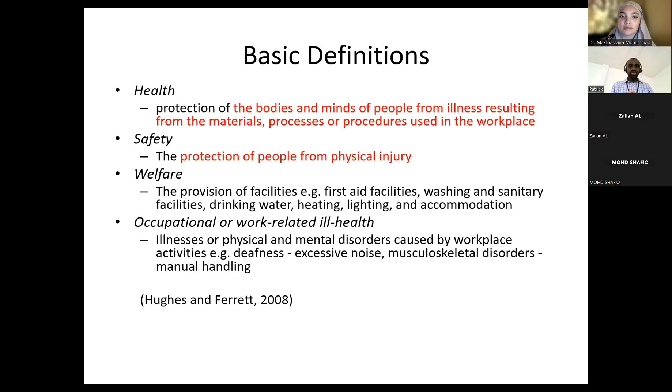Okay, so some basic definitions we should be aware of. When we talk about health, safety, and welfare, what do we mean? Health talks about how we protect the bodies and minds of people who work within our industry from illnesses resulting from the materials, processes, and procedures used within our workplaces. For construction, that means protecting people from illnesses resulting from the materials, processes, or procedures used within construction. Safety is mainly about protecting people from physical injury. So whereas health talks about illnesses, safety talks about physical injury. There are other things as well, but I wouldn't dwell too much on them.

When we hear people talk about accidents and near misses, what are they? A near miss is an incident that could have resulted in an accident. What is an accident? An accident is an unplanned event that results in injury or illness of people, damage or loss to plant, property, materials, or the environment, or a loss of business opportunity. If there is an incident that doesn't result in any injury or harm, we call those near misses. But if there's an incident that results in harm or injury, we call those accidents. In the UK, there's something else we call dangerous occurrences - these are near misses which could have resulted in a catastrophic outcome, maybe for people, for example the collapse of machinery or a plant on site.

What is a hazard? A hazard is anything that has a potential to cause harm. And what is risk? Risk is simply the likelihood of occurrence of harm.

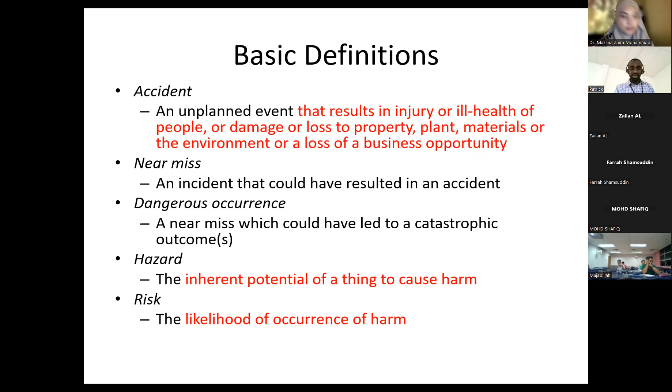Let me give an example. Assuming there is fire wherever you are now - fire is a hazard, it has a potential to cause harm. But the risk, or the likelihood of harm occurring to you as a result of the fire, may be zero. That's because the fire may be in the next room, and you are not exposed to it, so the likelihood of occurrence of harm to you may be zero or very low. So risk and hazard, although sometimes people use them interchangeably, are not exactly the same thing. Hazard talks about the potential for something to cause harm, while risk has to do with the likelihood of occurrence of harm as a result of that hazard. Oftentimes it is a hazard, and then being exposed to the hazard, that introduces the likelihood of harm occurring to you.

So quickly applying these definitions or concepts - on the screen there you have the tallest building in the UK, which is the Shard in London. So can you consider, considering this project...

Think about one potential hazard for this project. One potential hazard will be work at height, because people will be working at height, so that poses a hazard - it has the potential to cause harm. But what is the risk of an accident occurring as a result of the hazard? In this case it is very high, because people are exposed - the exposure will be high. How can that be eliminated or minimized? They might use fall protection equipment or harnesses, or design the building such that it is completely pre-assembled - components manufactured in a factory, then brought to site and assembled using mechanical means, so that people wouldn't have to work at height that way.

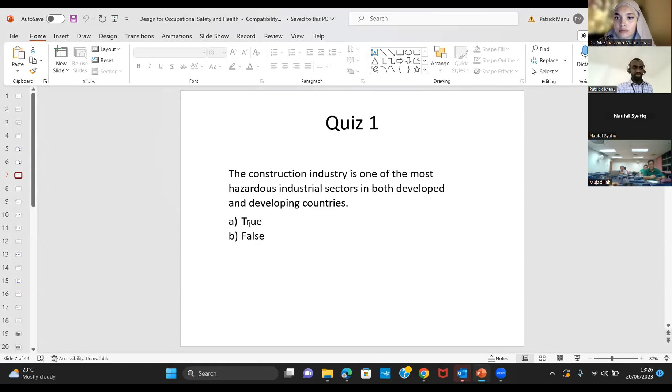Let's move on to the next slide. So, health and safety in the UK construction industry.

I'll give a quick overview of health and safety performance in the UK construction industry. The construction industry is one of the most hazardous industries within the UK, and has one of the worst performance in terms of safety and health, with one of the highest numbers and rates of fatal accidents. The industry is known for that.

The industry employs about 10% of the working population, but accounts for about 30% of all fatal injuries. That is very disproportionate - although we employ fewer people, we are responsible for the deaths of a greater portion of the people within the workforce.

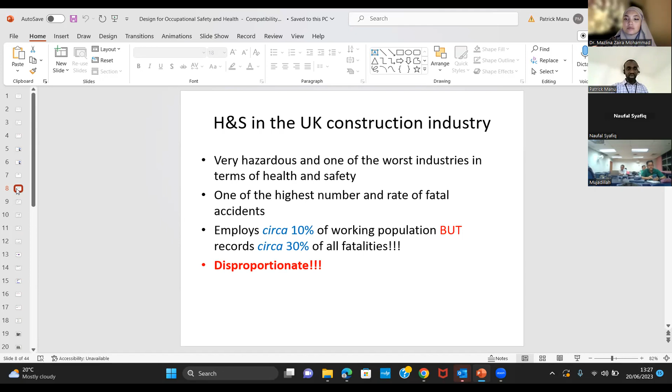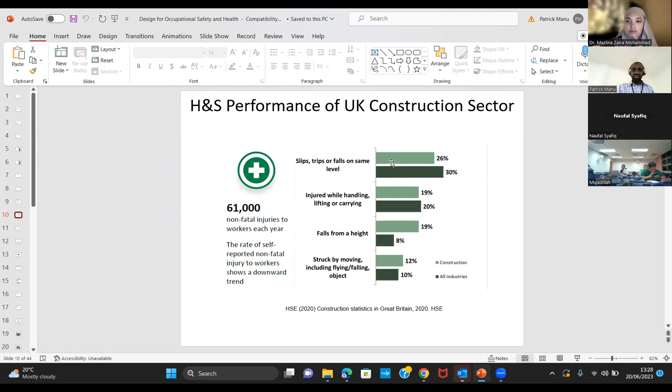In terms of non-fatal injuries, around 2020 the UK recorded about 60,000 non-fatal injuries, which is very high - a lot of people sustained injuries.

In terms of health illnesses and sicknesses, about 81,000 workers suffered from work-related ill health, either new ones or long-standing ones, but the majority of them were as a result of musculoskeletal disorders - people having problems like back pains and so on and so forth.

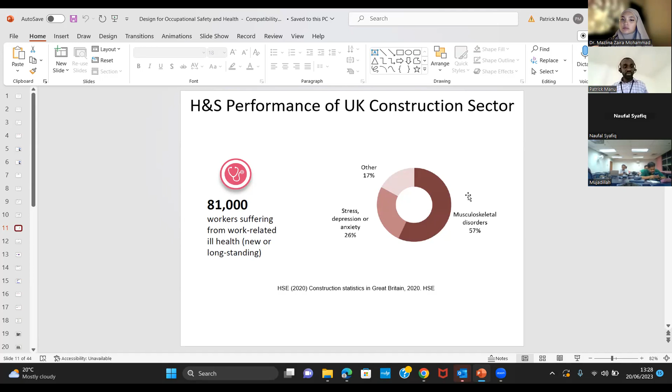That gives us some information about the health and safety performance in the UK. When we compare construction in the UK to other sectors - this data is a bit dated now, but what I want to highlight is this: although the trend seems to be going down over the years...

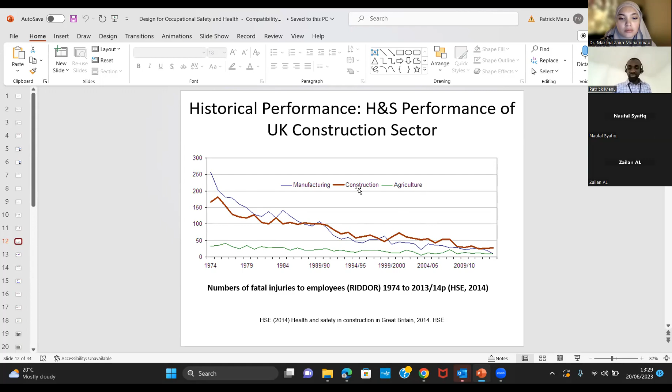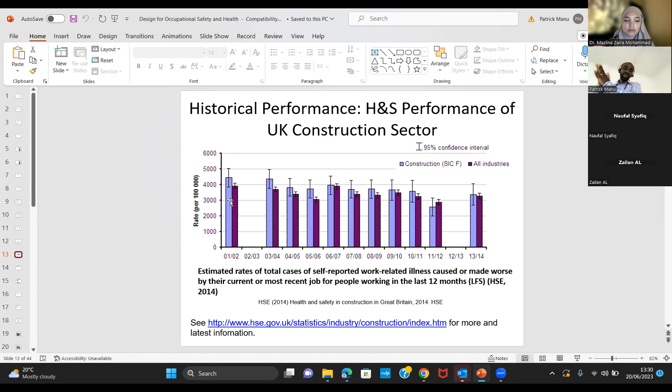Compared with other sectors, the construction industry has a reputation of accounting for a greater number of fatal injuries to people within that sector. In terms of illnesses, when you compare construction to other sectors, historical data shows we don't have a very good performance - consistently, the estimated rate of total cases of self-reported illnesses have been higher in construction compared to all other industries put together. That isn't good at all.

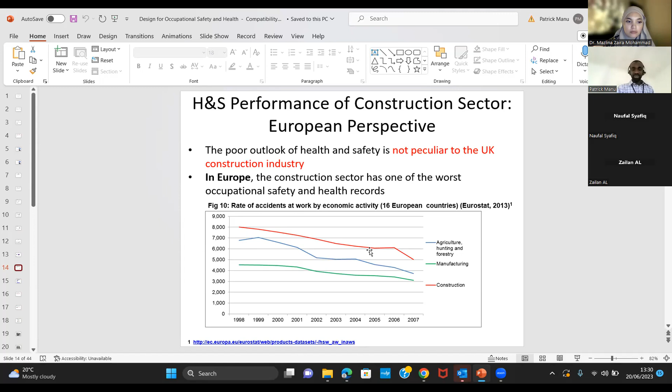When you go outside the UK and look at Europe, we see a similar trend where historical data has shown that construction has had worse performance in terms of health and safety compared to other sectors. And looking outside Europe, at countries like the United States, again we see a similar trend - construction accounting for a larger number of fatal injuries compared with some of the other sectors.

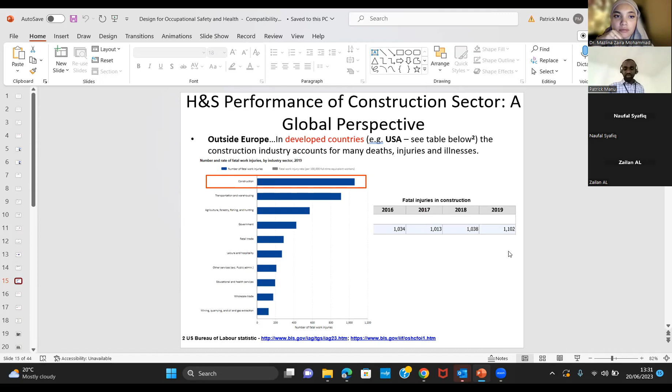In 2019, in the US, they recorded over 1,000 fatal injuries in construction alone. The US is made up of 50 states, so if you divide 1,000 by 50, that's approximately 20 - so over 20 fatal injuries in each of the states in the US.

On a global perspective, when you look at other countries like Vietnam, historical data shows they recorded a very high number and percentage.

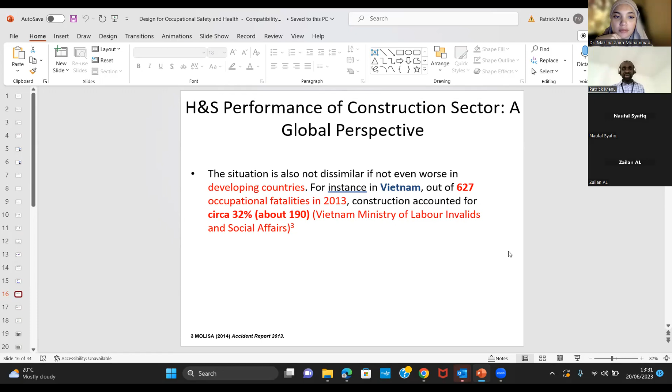For example, in 2014, when I went to the office, I saw on the BBC News that a worker on the Crossrail Tunnel project in London had died. They were trying to achieve zero fatalities on that project, but unfortunately, one worker lost their life on that particular project.

This brings me to my second quiz: Which of the following can be described as an underlying or root cause of accidents in construction? Let me bring up my second quiz.

But before I do that, let's look at the first quiz. I still had only... voting is closed. I may have closed the voting unintentionally, but we only have 6 people who responded - maybe the second quiz will have more people respond. Let's see the results: all of those who responded said yes, construction is one of the most hazardous sectors within the industry, so you got that correct.

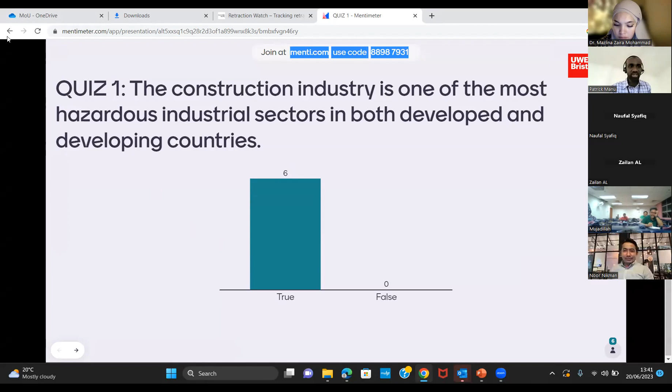Now let me move on to the next quiz. So my second quiz is this - let me share the quiz.

Okay, so this is my second quiz. Which of the following can be described as an underlying or root cause of accidents in construction?

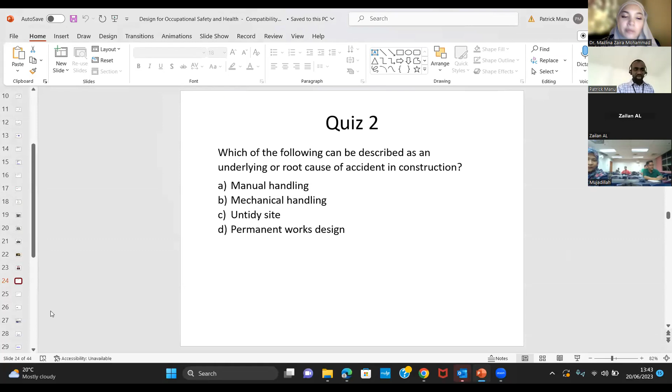Okay, so the case for improving safety and health within construction. As a result of the accidents, injuries and deaths, these have increased the need for us to address or improve safety and health within construction.

Accidents, injuries and deaths are related to huge economic and social cost. Some of the areas of cost are the cost to the employer, either the contractor or subcontractor. Government also incurs cost. The employees, the clients, the industry and society as a whole - we all incur costs as a result of working in construction. These are some of the areas of cost within construction.

In the UK, the Health and Safety Executive estimated the economic cost of injuries and illnesses in UK construction. They estimated that injuries and illnesses cost about 1.2 billion pounds - a very big amount of money - accounting for about 8% of the total cost of all industries, which is quite substantial.

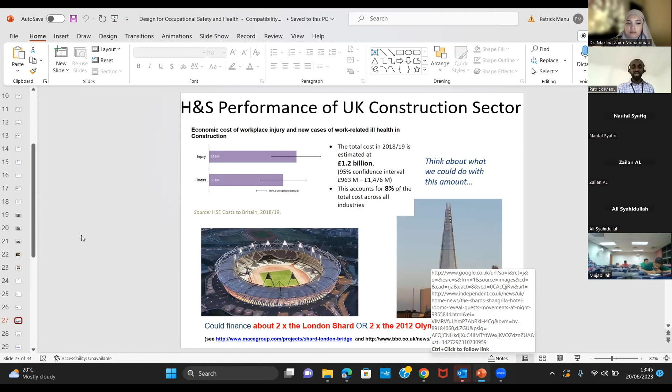But the point is, what could we do with 1 billion pounds? Assuming we are able to save 1 billion pounds - these are projects in the UK that cost about 500 million pounds at the time they were constructed. The London 2012 Olympic Stadium cost about 500 million, the Shard cost about 500 million pounds. So if we're able to save 1 billion pounds, maybe every year we'd be able to build one stadium and one Shard. That tells us the importance of the need for us to address safety and health issues within the construction industry.

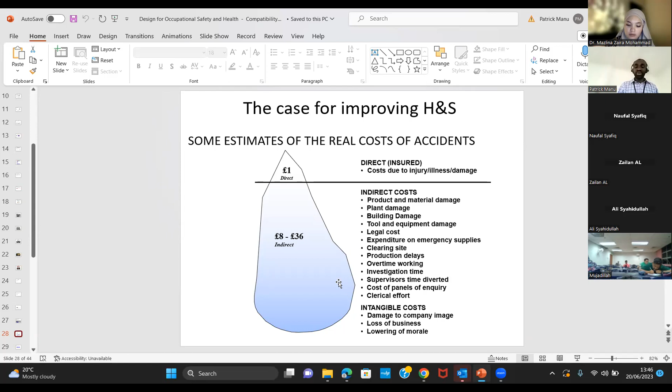And these costs are the tip of the iceberg. The ones we're able to estimate are the direct costs, but beneath the direct costs are other costs which are more intangible or more difficult to estimate. If we look at the direct and indirect cost of accidents, illnesses or injuries, that can be very huge.

Now let's talk more about what causes these accidents and injuries. Several studies have been done within construction, but I've highlighted just 3 of them. The first was done by a group of academics now at the University of Manchester. The second was done by researchers at Loughborough University, and the third was a piece of work I did for my own PhD. These studies presented models of accident causation within construction, trying to explain how accidents occur or the process and mechanism that leads to their occurrence.

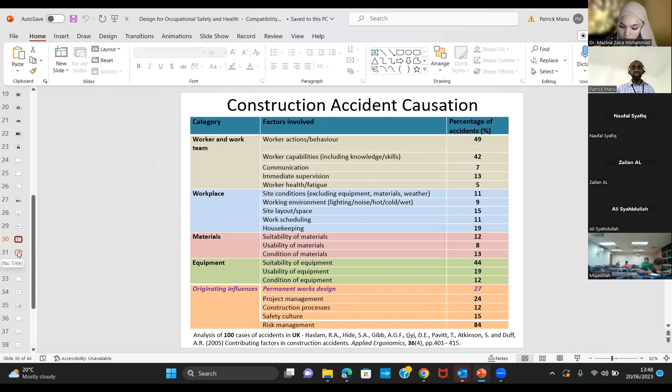The second study was by Haslam and colleagues. These were the causes of accidents they identified after analyzing 100 cases of accidents within the UK. It's interesting to note that worker behavior or action accounted for close to 50% of the 100 cases analyzed, but apart from that, there were other things they found contributed to the causation of those accidents. There are several studies in this area, so you can read more about them.

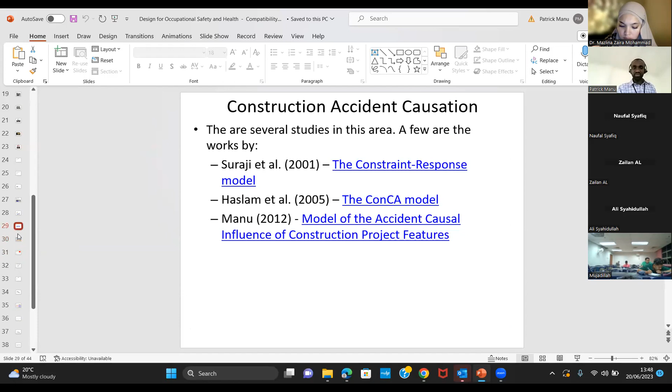Moving on, one of the things previous studies have shown is that design, how we design, can lead to the occurrence of accidents in construction. From my own PhD, one of the things found was that complex designs, in other words designs with intricate aesthetic qualities, have the high potential to influence accident occurrence.

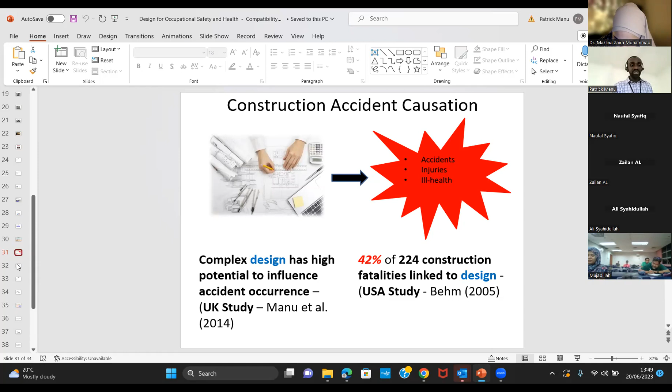Another study done in the US was able to link 42% of 224 fatalities to how the design was done, in other words the permanent works design. Another study in Australia looked at 258 accidents, 258 cases of fatalities, and they were able to trace some of those cases back to the design.

So there's a lot of evidence in literature to show that designs influence the occurrence of accidents within construction. It's not only design, but design is one of the key causes, if you like, of accidents within construction.

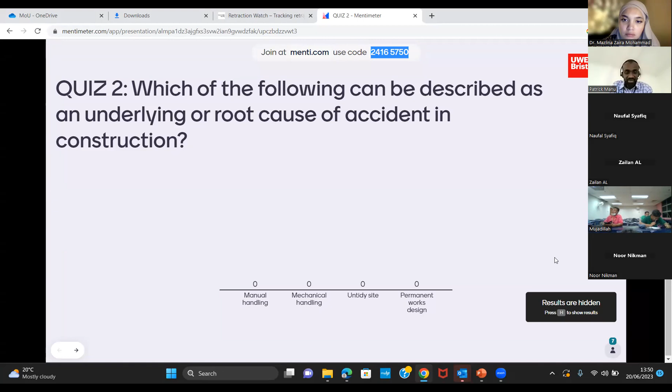And so that takes me back to my quiz. I asked, which of the following can be described as an underlying or root cause of accident? Let me see what people said. So 5 of you said it's untidy site, and 2 of you got it correct.

So it's actually permanent works design. Permanent works design is an underlying cause of accident because it is remote, in terms of proximity to the accident happening, that the permanent work design is further away.

In the process of accident causation, we can get that from this slide I showed you. From previous studies, they have something they call the immediate accident circumstance, or shaping factors, or more broadly what we describe as the immediate causes or the proximal causes. But behind the proximal causes are what we call the originating influences, or the underlying or root causes. As we can see from this study, permanent design was one of the prominent causes of accidents.

So things like communication, behavior, hazards on the site, supervision, and so on — these things come broadly under what we call the immediate or proximal causes of accident. So those of you who chose permanent work design, you have the correct answer.

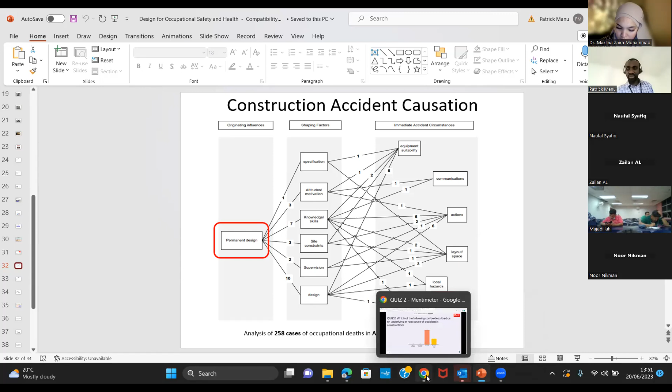So let's move on. My next quiz to you should come up. This is quiz number 3. Which stage of construction project life cycle offers the greatest ability to influence safety? Let me go over to the quiz, and then you can start answering it.

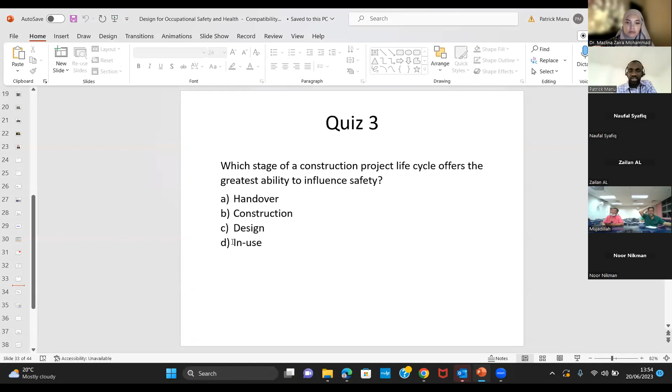We can see that from my next slide. This time safety influence curve was proposed by Szymberski. All that it's trying to say is that at the early phases of a project, the project participants or actors have the greatest ability to influence safety.

And the same argument goes for other things like sustainability, cost. At the early stages, the designers or the client or the project participant have the best chance or opportunity to influence several project outcomes, not just safety, but things like sustainability and cost. Because, for example, in terms of cost, if you design the building to be less expensive, you most likely get a building that is less expensive.

If you design the building to be very expensive during the construction phase, it becomes difficult to make it less expensive later, because it has already been designed that way. So that is the thinking behind this time safety influence curve.

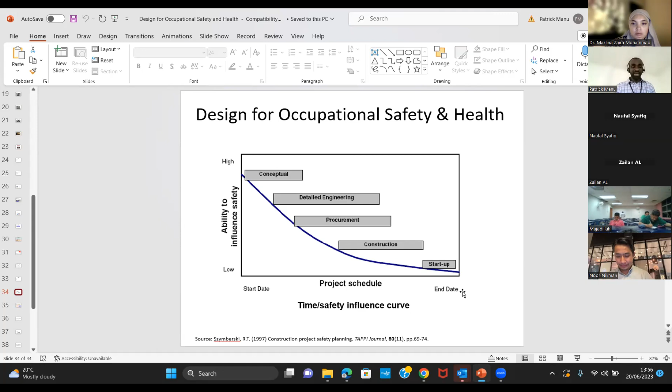That means clients, designers, project managers, or people within the built environment profession who work at the design stage are supposed to do our best to implement solutions that will make the construction phase less risky for people to work in. That's what it is about.

The concept of designing for safety also aligns with what we call the hierarchy of control. The idea is that when we design for safety and health, what we are trying to do is remove the hazard, so that during the construction phase workers wouldn't have to engage or interact with or be exposed to those hazards.

So the best thing is for us to remove them at source, and the source is the design. So either we remove them through the design work we do, or we try to reduce exposure to those hazards. That is what the concept of design for safety is all about.

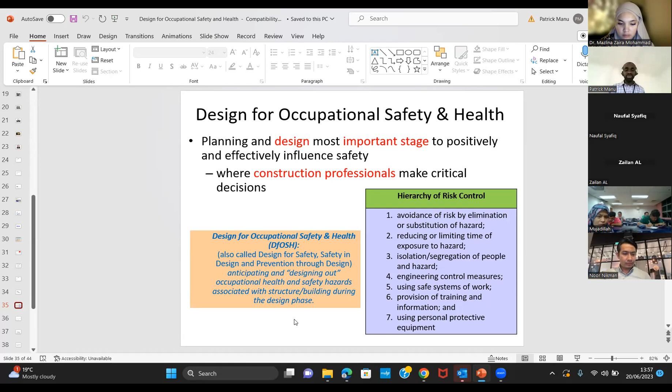In some countries they call it prevention through design, others call it design for safety, and so on. The whole idea is to anticipate and design out health and safety hazards associated with the structure or building during the design phase. Architects, civil engineers, structural engineers, service engineers all have a role to play when it comes to design for safety and health. But I'm conscious of time.

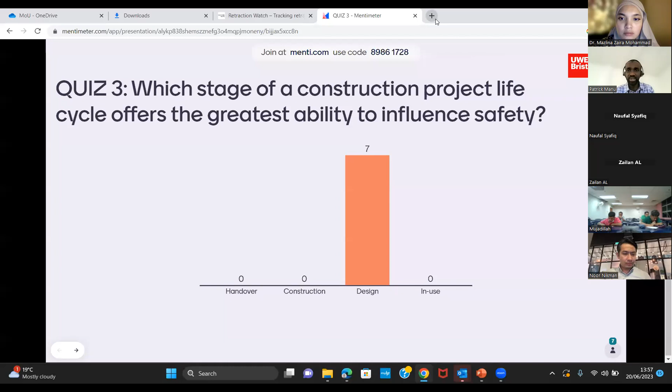I will pass these slides to you so you can take a look at these case studies, which give examples of design for safety. Let me just pick one of them to demonstrate, to illustrate. Hope it doesn't freeze.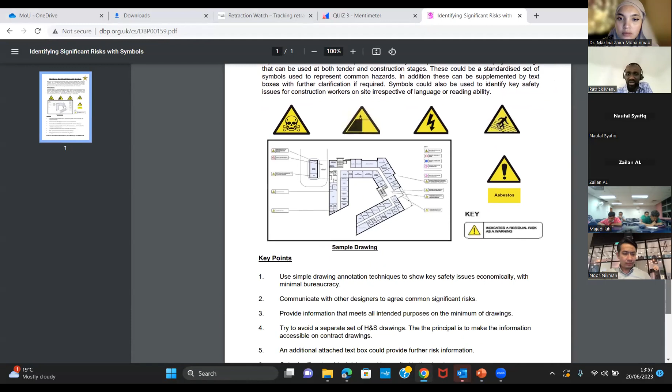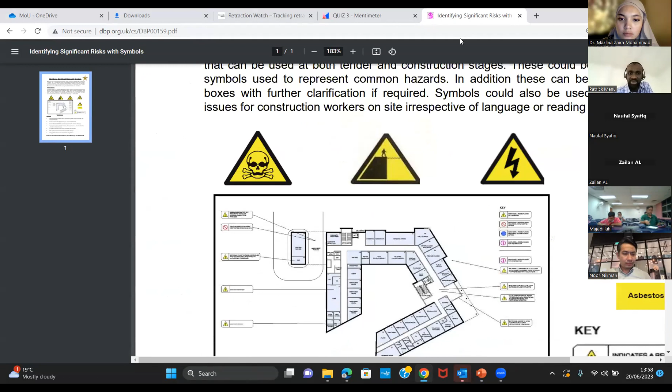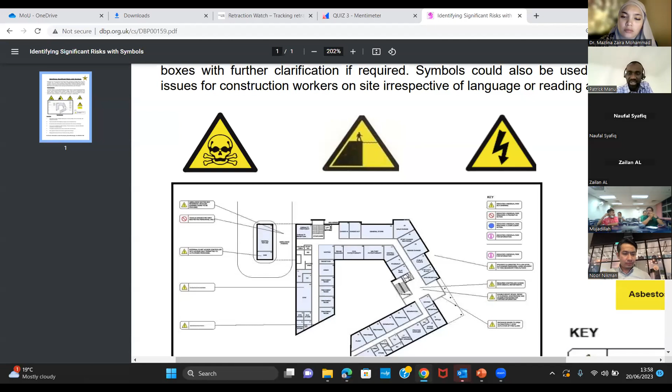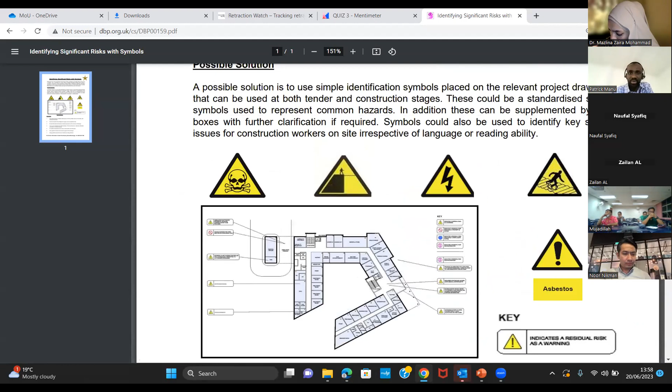This case study shows how we can use hazard identification on drawings. If you're a designer designing a building or a project, we can use symbols like these to communicate hazards to the construction team. For example, if there is a fragile material somewhere in the roof, the designer can use some of these symbols to communicate the location of hazards to the contractor. So this is one of the ways of communicating hazards, using what they call hazard identification drawings.

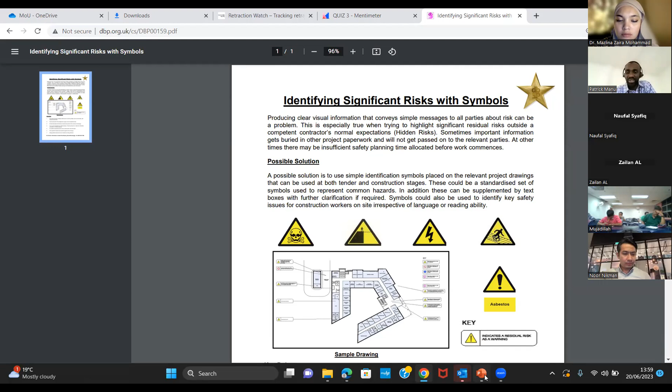But these days we have things like BIM. These symbols can be put on the BIM model to highlight some hazards that a contractor may be less likely to be aware of. So that's just one example of how design for safety can be done in practice.

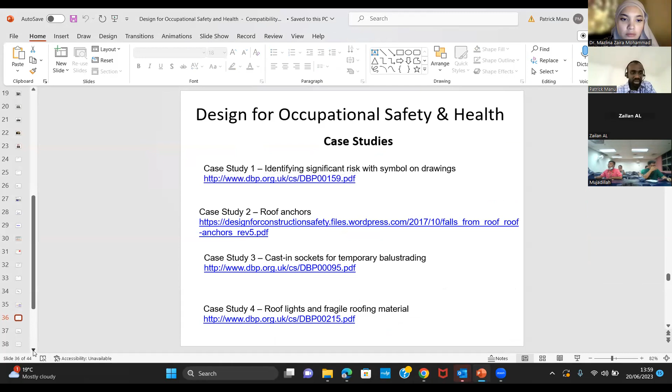But these other case studies give other examples as well. Let's move on to the next slide.

Now let's talk about the factors that affect design for safety within construction. Myself and some colleagues did a review of literature in this area, and this is what we found: several of the research works done in this area have tended to focus on designer awareness and knowledge and education.

As one of the factors affecting design for safety implementation, but that's not the only factor. Things like the attitude of designers, the availability of tools to facilitate design for safety, and client influence are major factors, because clients are able to influence that process more since they are the owners and the ones paying for the project. So as project managers, if you work within a client organization, we need to be aware that we have a lot of influence when it comes to promoting design for safety within construction. But there are other factors as well.

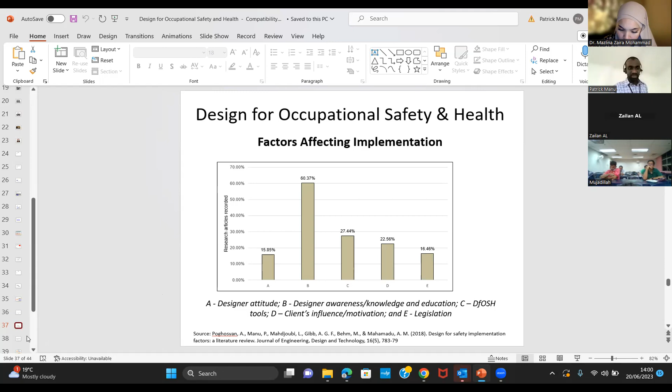In terms of design for safety, all over the world several countries have introduced legislation. For example, in Australia they have theirs, in the UK it's the CDM, and in Europe there is a broader legal framework that drives design for safety across the various countries within the EU. In Singapore, they have the design for safety regulation. In Malaysia, my understanding is that it hasn't yet been mandated, but the idea is that hopefully at some point it might become mandatory.

In terms of the CDM regulations in the UK, various individuals or organizations within construction stakeholders have specific duties. For example, clients have a duty, and it spells out what those duties are. Designers have specific duties, contractors have their own, as do principal designers, principal contractors, and the workers. These are what we call the duty holders—various stakeholders in construction that have specific duties they need to fulfill within the CDM regulation.

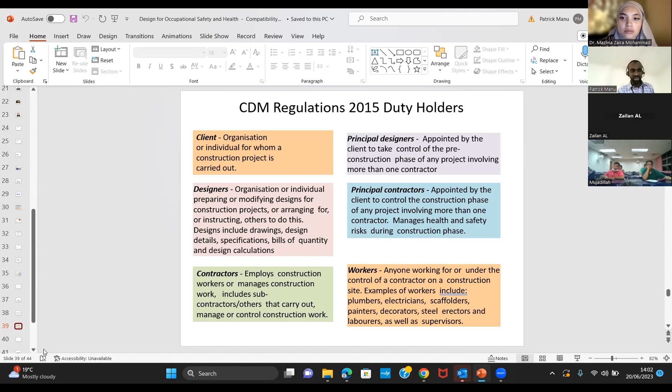Okay, so I'm almost done now, and I believe the same applies with the OSHCIM. The last time I was in Malaysia in January, Professor Kyril and Azman gave me some materials that showed various stakeholders that have duties, showing the things they are expected to do. I'm sure these will be covered somewhere on your program.